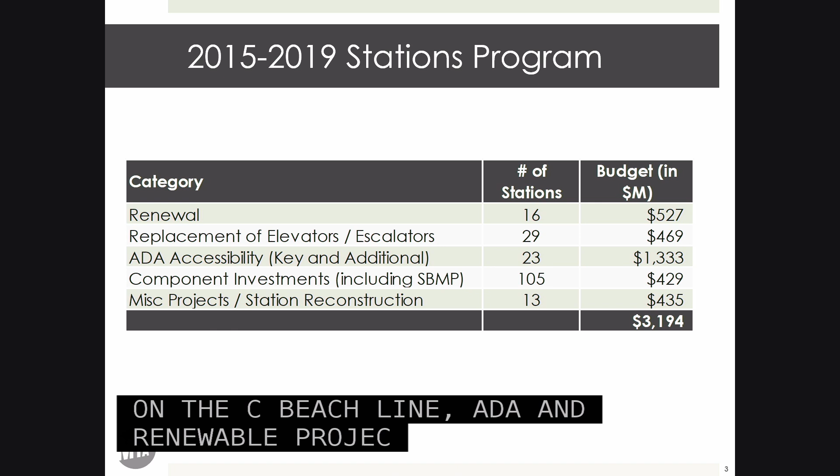Just to recap, the 2015 to 2019 stations program includes renewals at 16 stations, elevator escalator replacements at 29 stations, ADA accessibility at 23 stations, component investments at 105 stations, and miscellaneous projects at 13, totaling $3.2 billion. There's been no significant change in the overall budget since the last CPOC report.

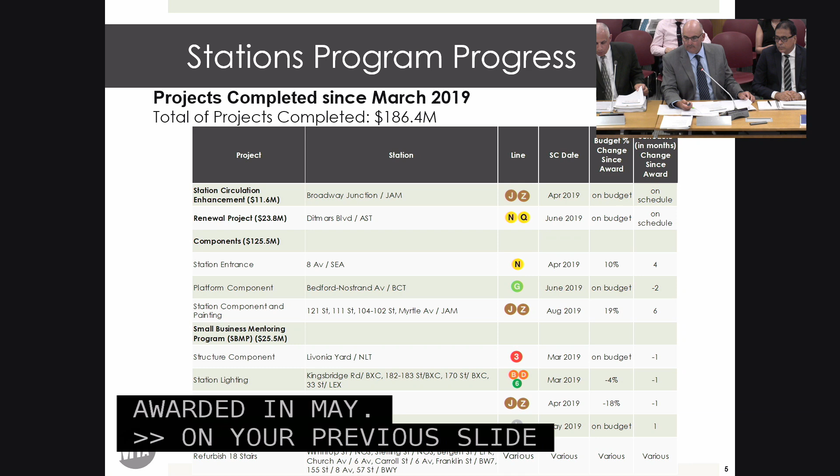On your previous slide there, on the bottom, on the Rector Street, you should have a W next to the R. And on your next page, at the top, it's the N and the W to Ditmars, not the Q. Q doesn't go there anymore. Thank you, Andrew, as always, thank you.

Let's see where we are. All right, so this slide, thank you, Andrew. This slide shows projects completed since the March 2019 report.

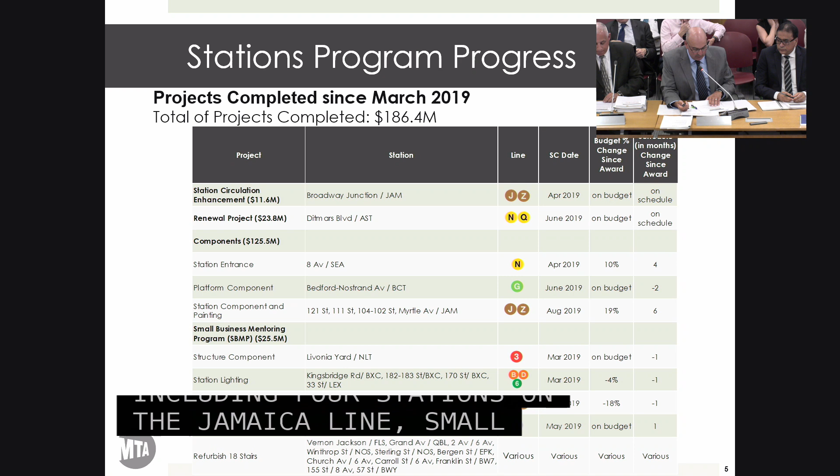Completed projects include station circulation enhancements at the Broadway Junction Station on the Jamaica Line, a station renewal project at the Ditmars Station on the Astoria Line, component projects at 6 stations, including 4 stations on the Jamaica Line, and small business mentoring projects at various stations, including the rehabilitation of 18 stairs. 8 of these projects were completed within or under budget and schedule, while the 8th Avenue Station entrance and the Jamaica Line component projects were over the original budget and schedule due to necessary extensive steel replacement and repairs, with excusable extensions of time to complete the additional work. The completed total projects was $186 million.

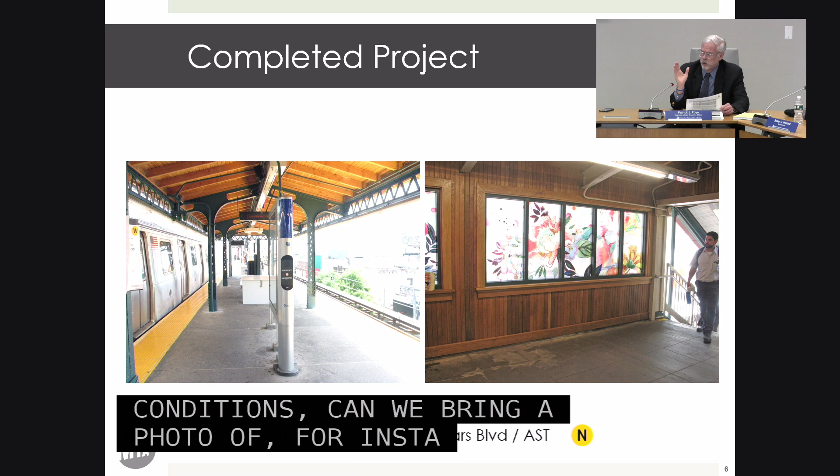So Tony, next time where there's unexpected conditions, can we bring a photo of, for instance, anything that's 10% or over? Bring a photo to show the board and the public? Yeah, and actually, I think we'll have some on the Jamaica project. Terrific, thank you. That will be good. Good.

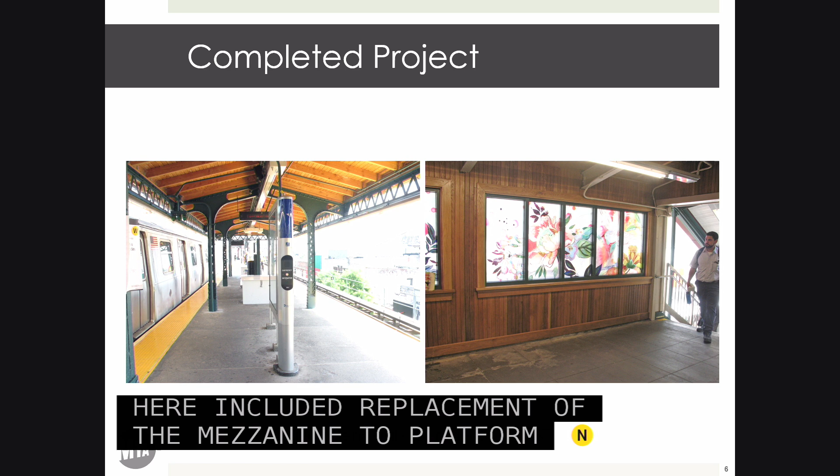So here's an example of a completed project on the station renewal at Ditmars Boulevard. Major scope items here included replacement of the mezzanine to platform stairs, replacement of mezzanine floors, doors, and windows, replacement of canopies and windscreens, repair of column bases, new platform edges, rubbing boards, tactile warning strips, and ADA boarding areas.

Yeah, we'll fix it. Thanks.

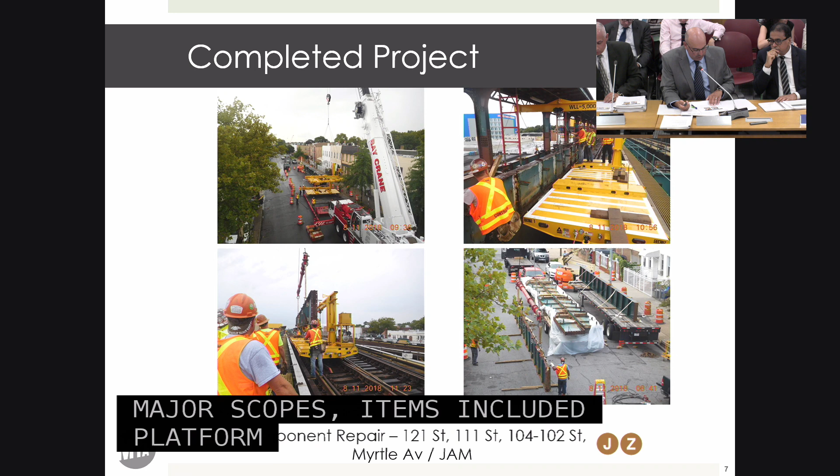These photos show the station component project at the 4 stations on the Jamaica Line, and this is actually the project where we did have extensive steel replacement. The major scope items included platform girder replacement, platform reconstruction and new edges, canopy extensions and new windscreens, new platform lighting, replacing mezzanine to platform stairs, and column repairs. These are actually the slides that show the steel.

So Tony, just on that one, unexpected conditions on stations is not an infrequent thing. Is there some way, without doing something invasive, to get a sense of the conditions in terms of steel, platforms, et cetera, before work starts? Do you want to take it?

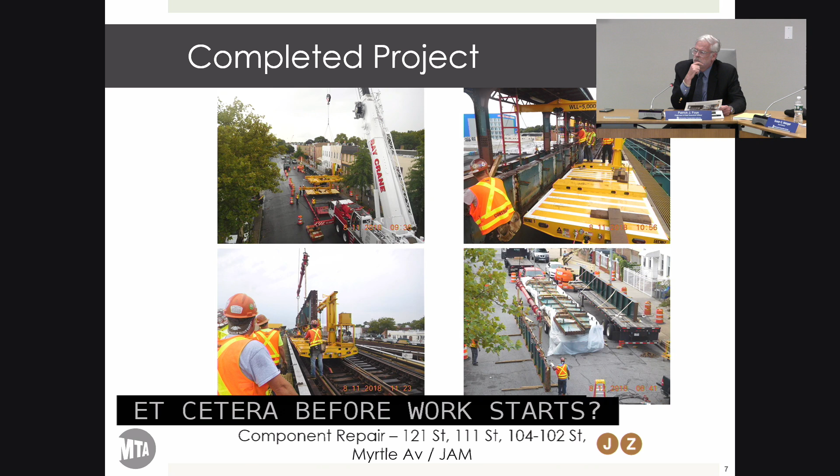Actually, we're looking at this one right now. I think we have seen several projects, mostly the elevator structure. I think for ourselves also, we got to do something different. So what we're trying to do right now, part of the design, is do some sample exploration. In fact, we are now putting those projects as consultant design - that scope is part of the consultant - and some projects are in-house design. We're hiring a contractor right now to support our in-house team. This way, we will know part of the design so we can scope it appropriately.

Earlier today at a committee meeting, we did add money for the Fort Hamilton Parkway issue that you uncovered. This is a problem that also impacts the work that the railroads are doing on their own stations. Metro North has a lot of stations that need to be repaired, and one of the major causes of cost overruns is we open them up and they're a lot worse. So this is an example of something that really needs to be spread into the operating agencies as well as capital construction. Any technology you come up with may be useful to them, just as it is to you.

Absolutely, actually, this is the one we're trying to make sure of. Many of those things we learn right now, historically, because there is another problem - we don't have the geo, we don't have the access, all these things. So visually look at this one. Once you take the peel of the paint, then you see it - or nothing behind it. So the one simple concept I am telling my team: if we expect a contractor to do something, remove the plank, I want to know what is underneath. If the steel structure is good, or you're taking a wall out, you want to know what is behind the wall, what to expect. So we're doing those explorations now in order to get the scope right and the quality design. So we most certainly will share with them.

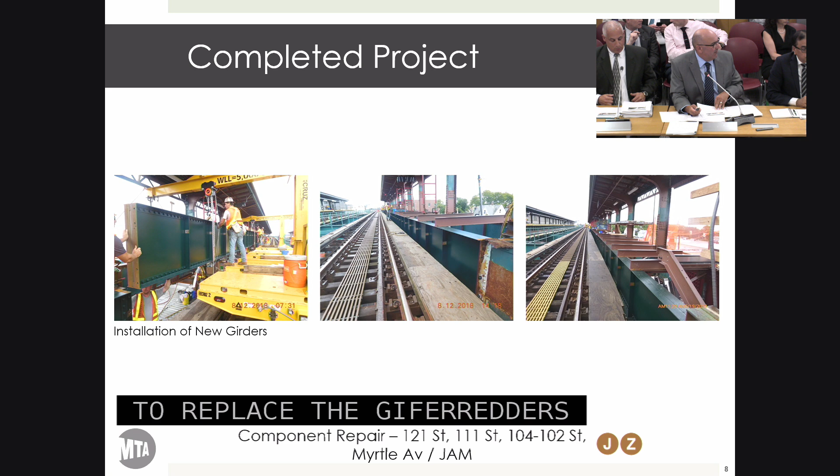So these photos actually show the additional work we had to do on the Jamaica Line at 104th, 111th, and 121st Street. The contract had called to repair these trackside platform steel girders at the 3 stations. When they were uncovered, there was extensive corrosion, especially on the top flanges and in the webs. So it turned out we had to replace all the trackside platform girders on 6 platforms at 3 stations - about 11 or 12 50-foot girders at every station, plus the steel structure that sits on top of it, and rebuilding the platforms. So it was fairly extensive.

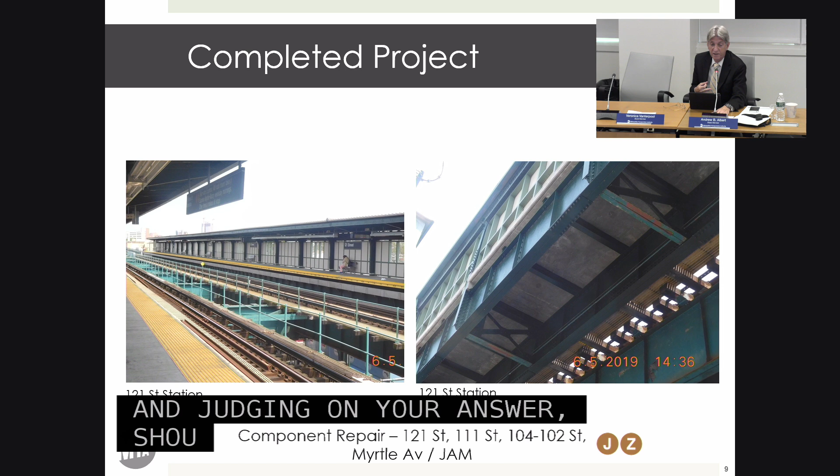Can I just ask, while you described that condition, how many years do you think it took for that to become that way? And judging on your answer, should we be inspecting our elevated structures on a more frequent basis? Well, these are original girders, so they're probably 100 years old. I think there is a standard, we have the inspection plan already - every 4 to 5 years. Would that regular inspection have uncovered this? They will not uncover this. Like I said, we don't go and take the paint off and all this. So that requires special attention during the design.

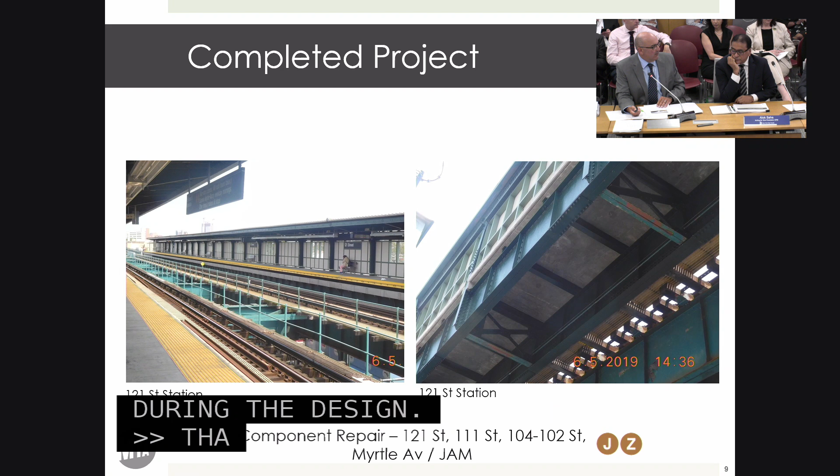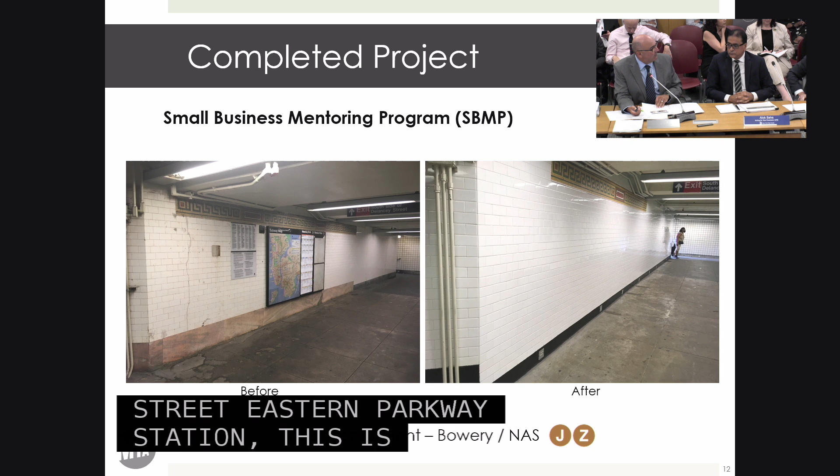Again, these are just more photos of the completed work at Jamaica, showing the new concrete platforms and new windscreens. This is the 104th Street station, similar work again - new platforms and new girders that were replaced. These next few slides show completed work in the small business mentoring program: a subway stair refurbishment at the Bergen Street Eastern Parkway station, a mezzanine component project at the Bowery-Nassau station with some new tile work, and another refurbished stair at the 155th Street station on the 8th Avenue line.

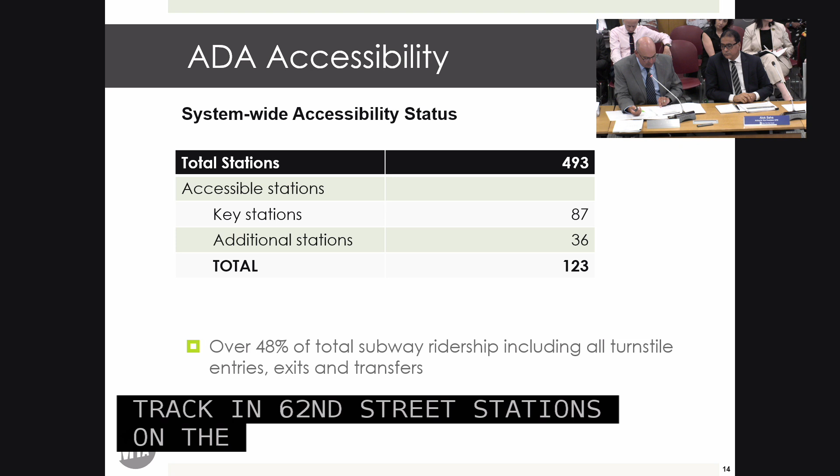I'll move on to ADA accessibility. The next slide shows the system-wide accessibility program status. Out of a total of 493 stations, including Staten Island, 123 stations are accessible - 87 key stations and 36 additional stations. An additional 3 accessible stations were placed in service since the last report. These include 86th Street on the Lex, which was a developer project, and New Utrecht and 62nd Street stations on the Sea Beach West End lines. These stations are utilized by over 48% of total subway ridership based upon turnstile entries, exits, and transfers.

For the 13 remaining key stations, 68th Street-Hunter College is in final design, and 12 are currently in construction, for a total of $883 million.

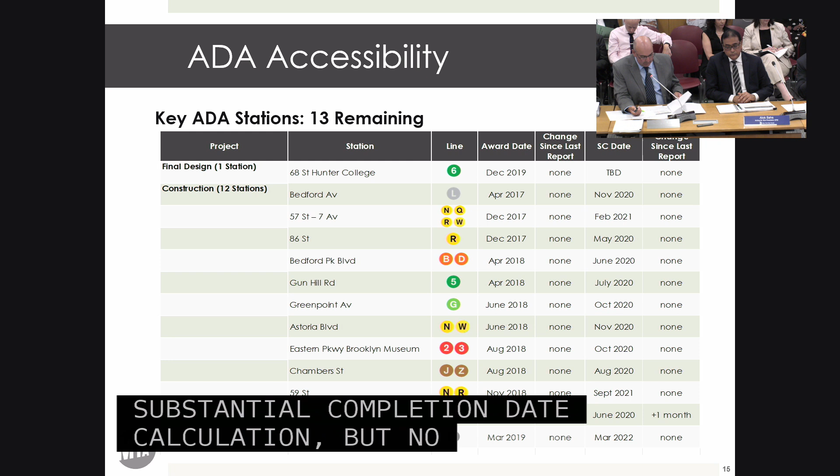Just to point out, the Rockaway Parkway schedule moved by 1 month from the previous report. There was an error in the substantial completion date calculation, but no change in the contractual duration of 18 months. And have the issues with Hunter College been resolved? No, they're not resolved.

In addition to the key stations, we also have 23 additional ADA stations in various phases of design and construction. 6 are in pre-design, 13 are in design, and 4 are in construction. 7 stations have been added since the last report in design and pre-design. These stations total $1.3 billion.

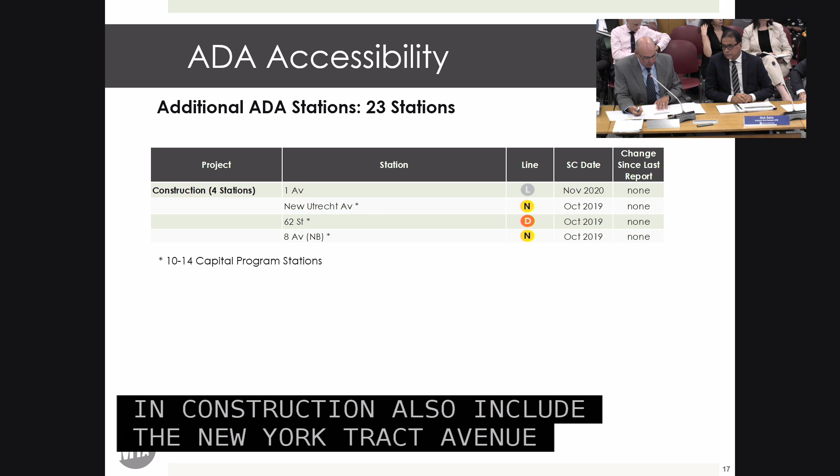Additional ADA projects in construction also include the New Utrecht Avenue and 62nd Street stations, which were placed in service in July. More detail on the Sea Beach Line stations will be discussed later in the report by Bill.

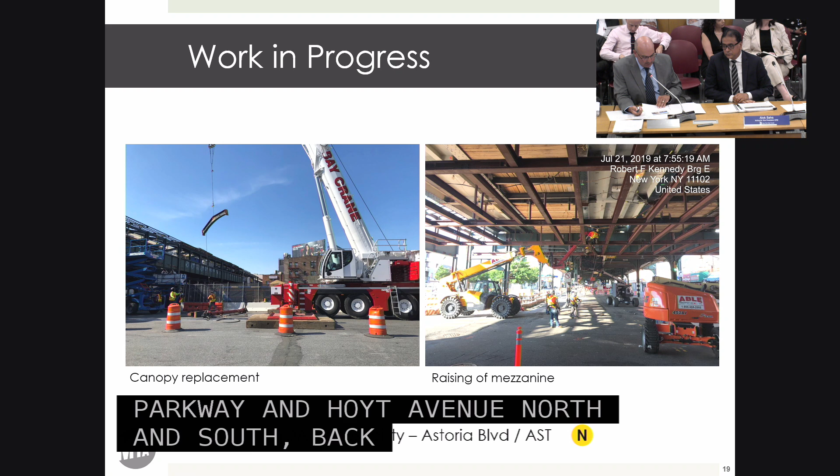Major scope items include 4 elevators, 2 street and 2 platform, structural steel repairs, full reconstruction of the hung mezzanine for additional truck clearance, and extensive coordination of street intersection closures in conjunction with GOs and city field events. So cooperation of DOT has been integral to moving this one along.

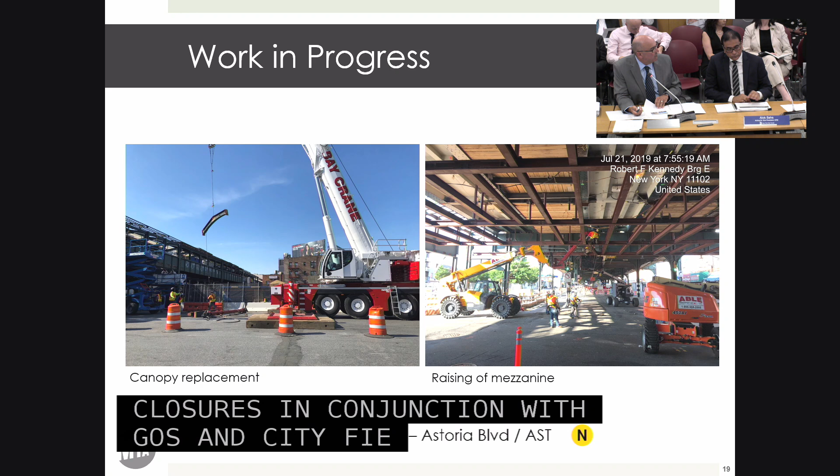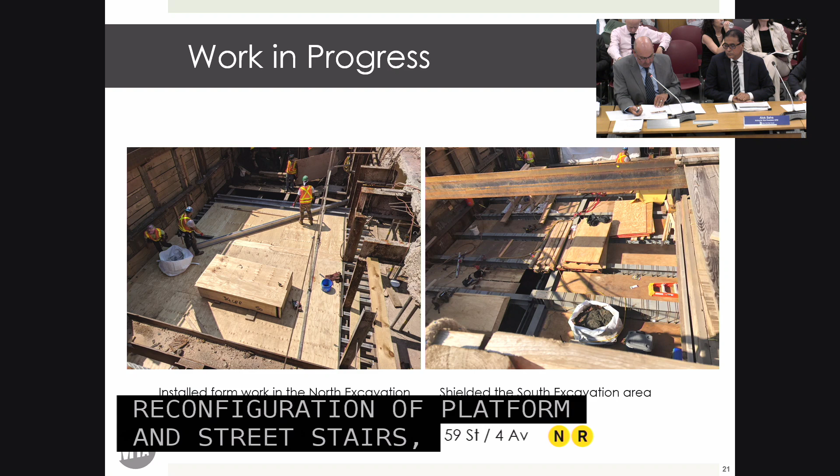These are some photos of the ADA project at the 59th Street station on the 4th Avenue line in Brooklyn. The scope includes 3 new elevators and machine rooms, 1 street to mezzanine, 2 mezzanine to platforms, relocation and reconfiguration of platform and street stairs, expansion of the north mezzanine, and ADA boarding areas with tactile warning strips. These are just some conditions.

Bill Montanil will continue with the status of the system-wide accessibility study and the Sea Beach renewal project. Thank you and good afternoon.

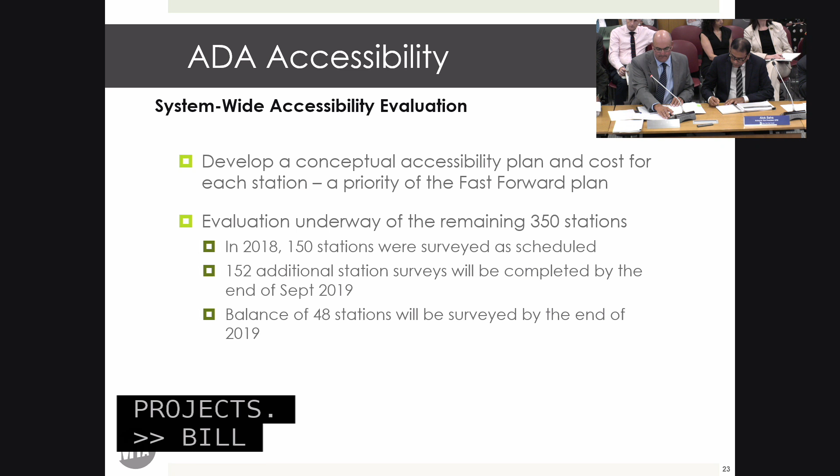This slide shows the progress of the system-wide accessibility study. Evaluations of the remaining 350 stations are underway. 150 station surveys were completed by the end of December 2018 as scheduled. An additional 152 stations will be surveyed by the end of September 2019, an increase of 88 stations since the last CPOC report, with the balance completed by the end of 2019.

And Bill, those last two bullets—we're going to hold to those schedules? Yes, sir. Thank you. The evaluations develop a conceptual accessibility plan and order of magnitude cost for each station, a priority of the Fast Forward plan.

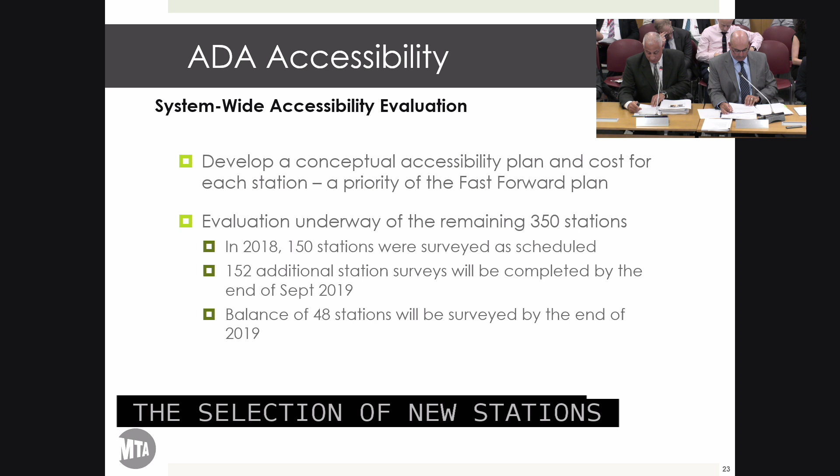The evaluations will inform the selection of new stations and have informed the selections of new stations in the next and subsequent capital programs. We will be advancing the Fast Forward plan strategy of an additional 50 accessible stations with the strategy of no more than 2 station stops away—recently increased to 70. Yes.

I am happy to report that the 6-station renewal project was placed in service July 2019 as scheduled. In addition, the ADA elevators at the New Utrecht 62nd Street complex were placed in service July 2019, making both stations completely ADA accessible. The 8th Avenue Station northbound elevator remains on schedule for operation in October of this year, and the additional work associated with the southbound elevator will be deleted from this contract and included in an upcoming ADA elevator contract that I will speak about shortly.

The substantial completion of the 3-station renewal project was achieved on March 6th, 2019. No change since the last report. The 7th Avenue entrance of the 8th Avenue station was completed in April 2019 on schedule, and the substantial completion date of the 6-station renewal for October remains on schedule. The project budget has decreased by $18 million due to the 8th Avenue elevator being repackaged with another project.

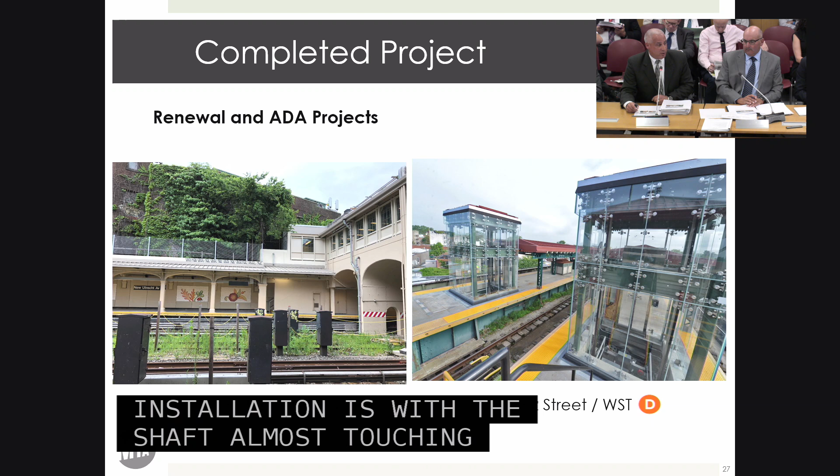These are some photos of the refurbished New Utrecht station and 62nd Street station. Just call your attention to the photo on the right of the 62nd Street platform, showing how tight the elevator installation is, with the shaft almost touching the yellow tactile edge. It's impossible to put that elevator in the middle of a station; it had to be put at the end of a station.

Regarding the elevators at 8th Avenue, the northbound elevator is on schedule to be put into service by the end of October, and the southbound elevator will be included in another contract to be awarded in the first quarter of 2020 with an in-service date of December 2020.

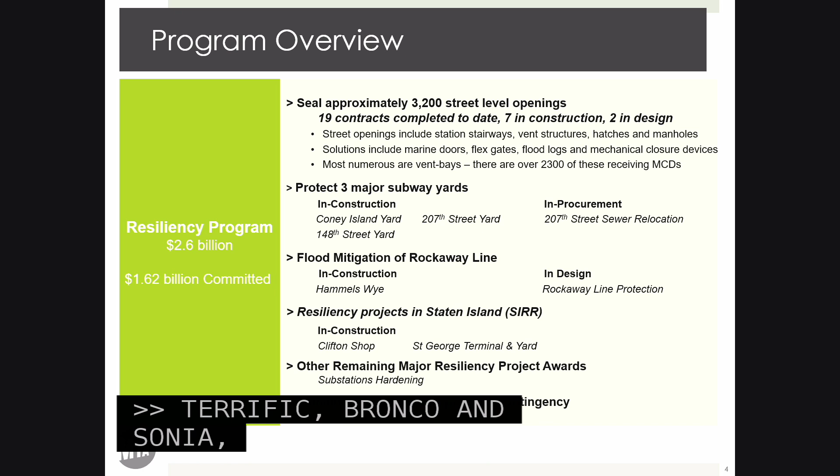Good afternoon. My name is Branko Kleva. I'm program executive for the Sandy program. Sonia J. Singh, executive for infrastructure division, and I will be presenting the Superstorm Sandy Recovery and Resiliency Program update. The update includes program overview and updates of the 3 yard projects and the Clifton Shop reconstruction project.

In the recovery program, so far we have rehabilitated 7 of the 9 underground river tunnels that were flooded during Superstorm Sandy. Of the 2 remaining tunnels...

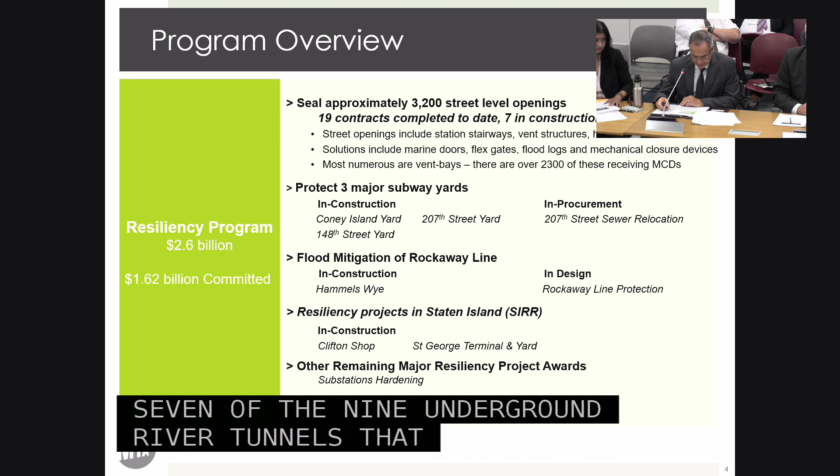Sorry, can you go back a page on the PowerPoint? Yes. Thank you, sorry, I jumped. No problem.

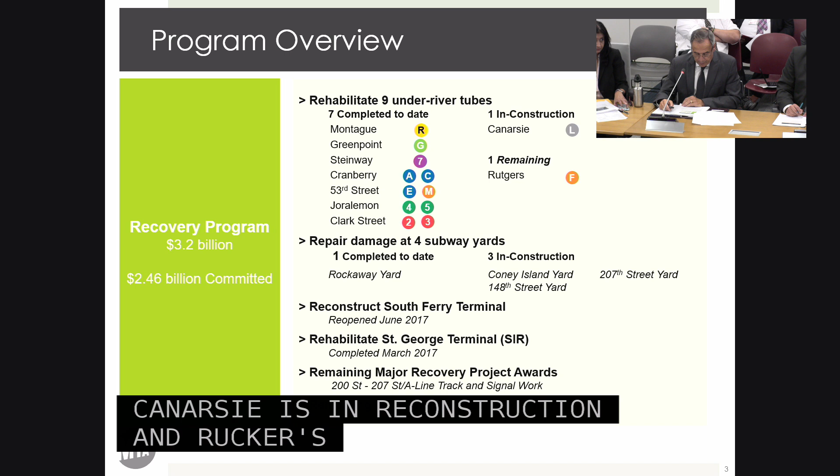So in the recovery program, we have rehabilitated 7 of the 9 tunnels. The 2 remaining, the Canarsie Tunnel and Rutgers Tunnel—the Canarsie Tunnel is in construction, as you know, and the Rutgers Tunnel would follow after the L-line tunnel is completed. We have repaired damages at the Rockaway Park Yard, and the other 3 yards are in construction, and I will provide more details on the progress of those 3 projects.

There are only several recovery projects remaining to be awarded, one being the rehabilitation of track and signal equipment along the A-line between 200th and 207th streets, which will be issued as a design-build project next year.

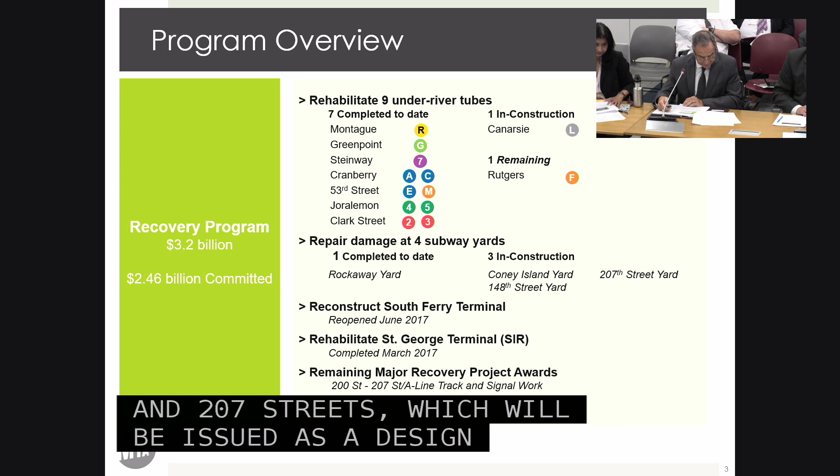As part of the resiliency program, we are well on our way of installing various devices to protect flood vulnerable street openings, including station entrances, vent structures, hatches, and manholes. All of these devices, such as marine doors, flex gates, flood logs, and mechanical closure devices, are custom made for each opening. Vent bays are most numerous.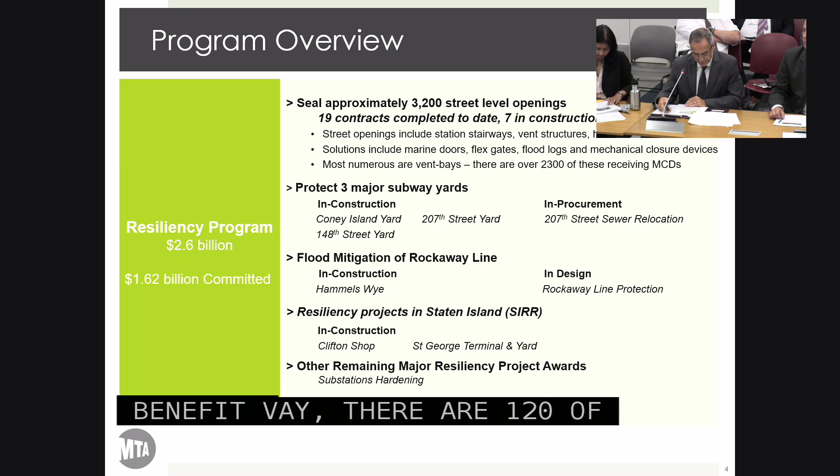There are over 2,300 of these, and we are well on the way of completing the projects to close them all. The 3 yard projects, Coney Island, 148th Street, and 207th Street Yard, include both repair and resiliency work. More details on these will be coming up in the upcoming slides.

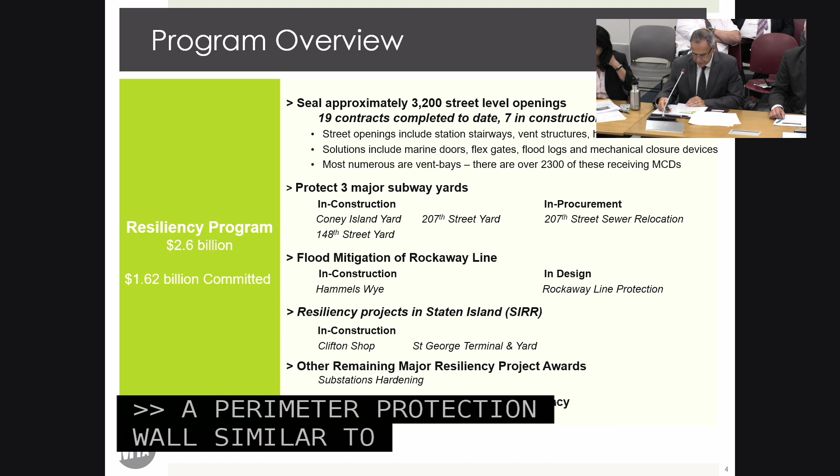A perimeter protection wall similar to what is being installed at the 3 yards has been installed at Hammels Wye facility in the Rockaways, while further protection of the Rockaways is being developed and will also be issued as a design build project next year.

Also, a project to protect the St. George Terminal in Staten Island has been awarded for construction, and a design build project for the new resilient Clifton maintenance shop is underway, and Sonia will provide additional information.

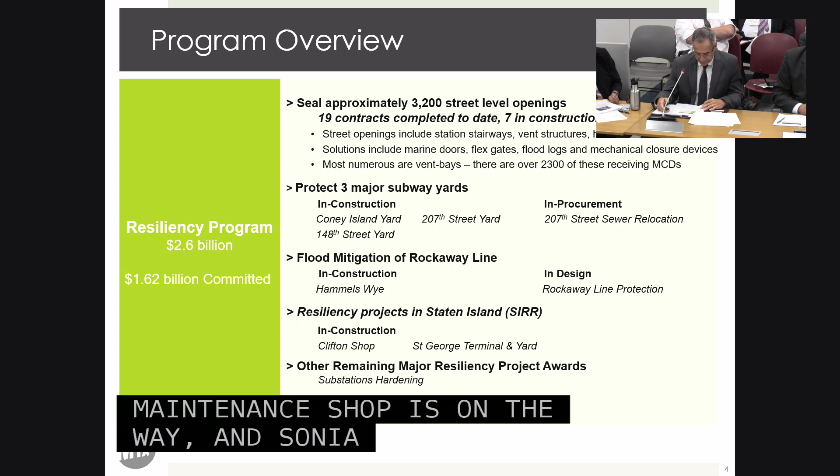One of the remaining resiliency projects includes hardening of power substations, which is to be awarded as a design build project next year.

The Coney Island Complex is the largest rapid transit facility in the world, covering 95 acres. It includes 3 smaller yards serving 6 subway lines and has capacity to store 881 rail cars. It houses 4 train repair shops, a rail car wash, various equipment and support facilities.

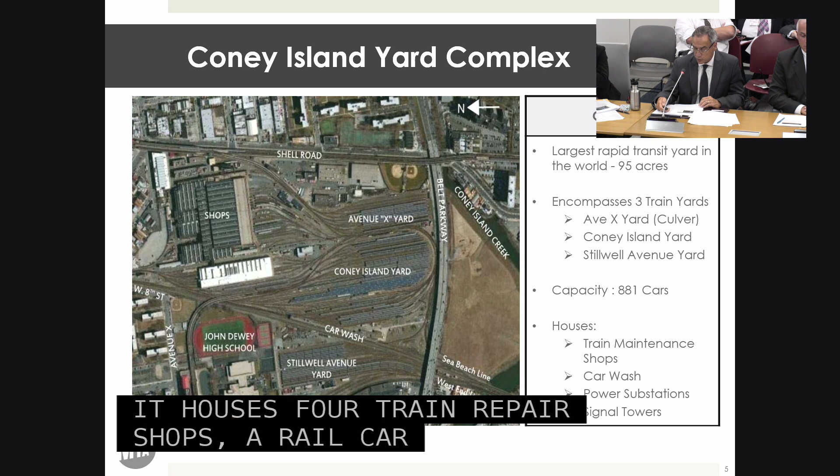The Coney Island Yard was awarded to Tully Construction in March of last year. The project involves installation of approximately 12,000 linear feet of flood wall, 9 floodgates, hardening of the traction power motor shop,

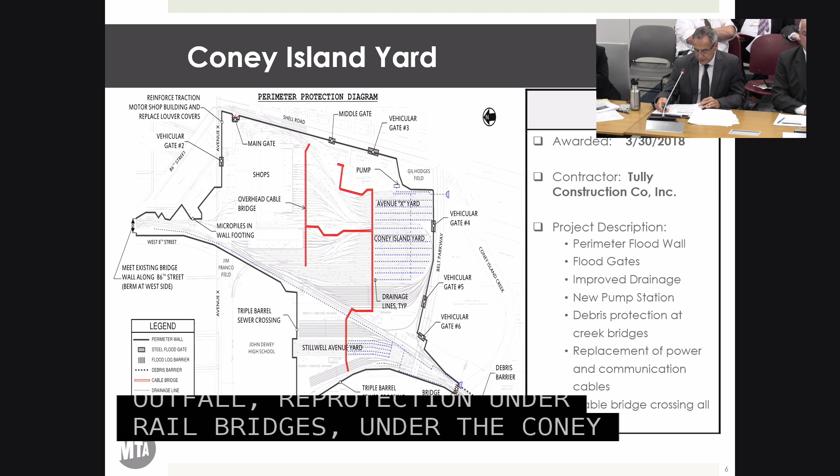21,000 linear feet of new drainage, 2 new pump stations, an additional outfall, debris protection on the rail bridges over the Coney Island Creek, as well as construction of a bridge that will carry power cables and communication cables across the yard tracks. It also includes the replacement of power communication cables that were damaged during Superstorm Sandy.

The project is on schedule and within budget.

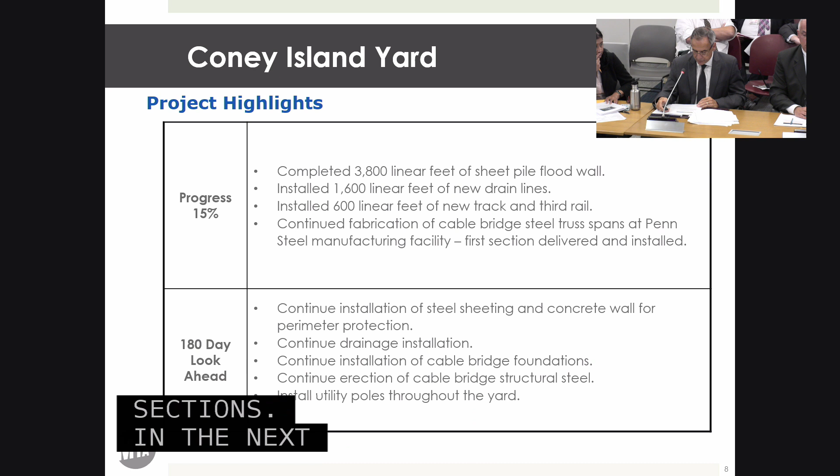The project is approximately 15% complete. In the last 6 months, the contractor has made significant progress in the installation of flood wall and new drainage. He has also continued with the fabrication of the cable bridge and has delivered and installed one of the sections. In the next 6 months, the contractor will continue with the installation of the perimeter wall, drainage improvements, and the cable bridge.

And Bronco, 15% is where they should be in terms of the schedule they gave us? Yes, as far as the 15% is representative of what the contract would be at this time. Usually in the beginning of the job, there is mobilization and other work that eats up the time. They catch up as the project goes on. Thank you.

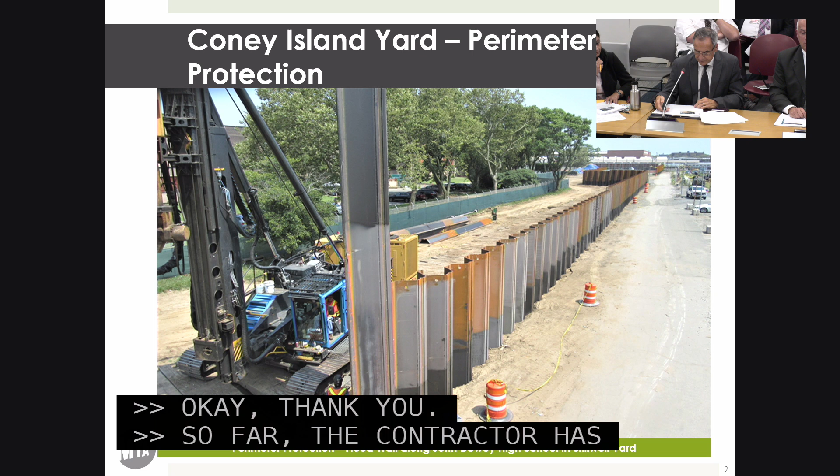So far, the contractor has installed over 3,800 linear feet of perimeter flood wall, which ranges in height from 8 to 14 feet, and is driven approximately 30 feet below ground. He has also installed over 1,600 linear feet of new drain lines.

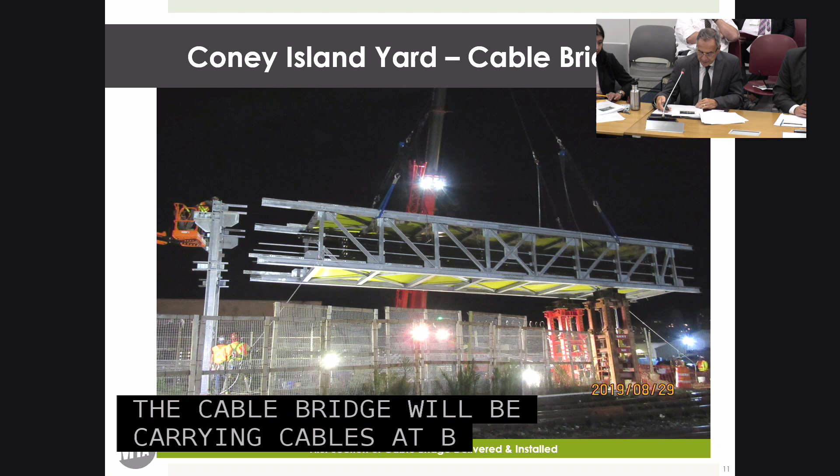This is an installation of the first cable bridge section. The cable bridge will be carrying cables, both power and communications, which makes it easier for maintenance, and also easier to install because they are not on the ground and on the tracks as they previously were. The bridge would also serve as a walkway for employees, making it easier and safer to go across the yard. It was fabricated off-site and brought to this site.

It is fabricated off-site and then delivered in approximately 60-foot sections. Thank you.

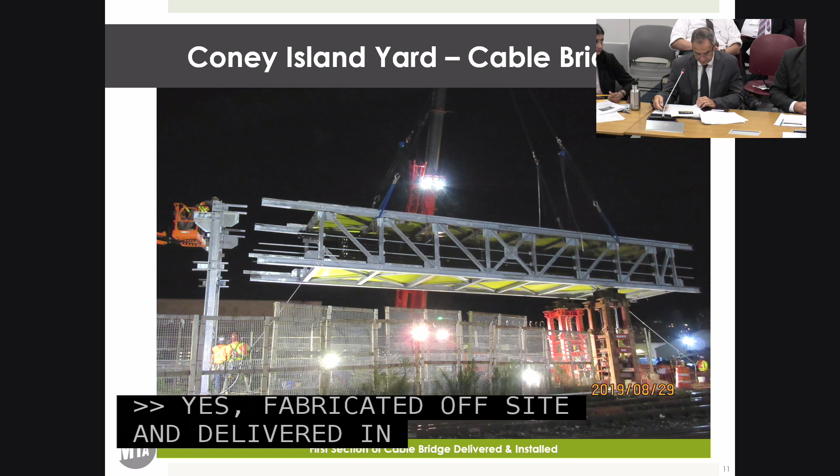All of the project milestones are on schedule, and there are no significant outstanding issues. The project team and the contractor are being proactive in anticipating risks and taking appropriate steps to mitigate each risk.

Some of the remaining project risks include storage space for storage areas, as well as tight clearances within the yard for placing cranes to install the cable bridge. The risk for storage has been partially addressed by the contractor acquiring adjacent properties and by coordinating with yard management. Similarly, there is ongoing coordination with yard management for track outages and for staging the crane and other construction equipment.

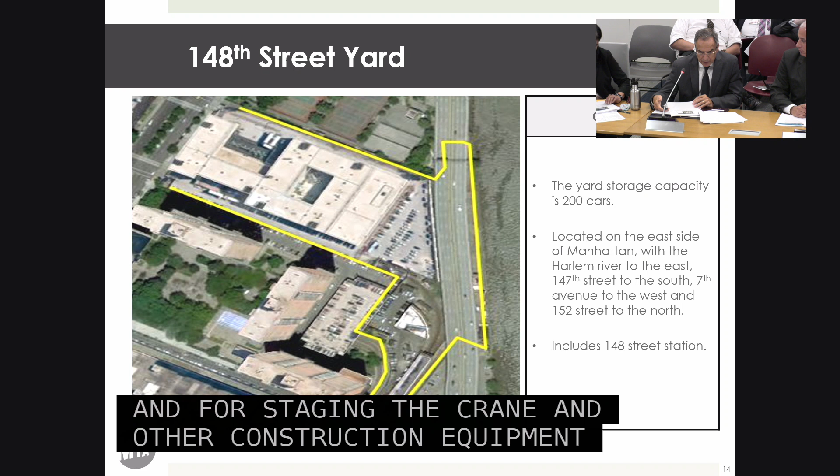148th Street Yard is located on the east side of Manhattan between 147th and 152nd Street, next to the FDR Drive. It serves as the storage yard for the IRT's number 3 trains. There is a station, 148th Street, within the yard itself.

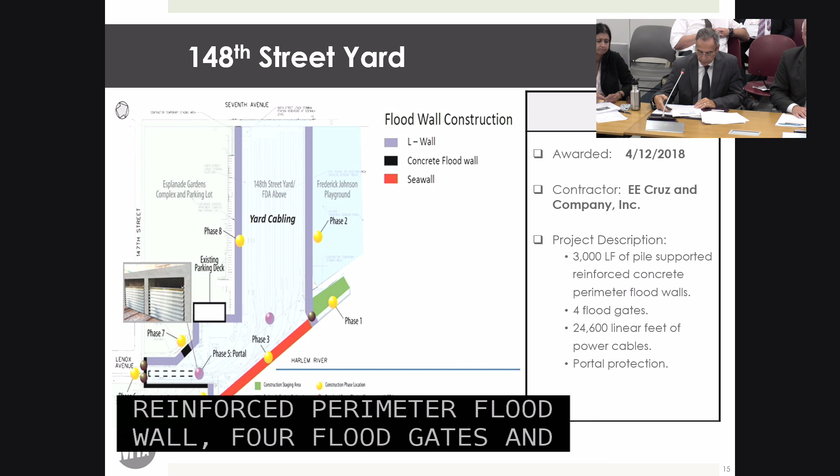The project was awarded to EE Cruz in April of last year. The project includes installation of 3,000 linear feet of pile-supported reinforced concrete perimeter flood walls, 4 floodgates, and a deployable lock system at the tunnel portal. It also includes the replacement of about 24,000 linear feet of power and control cables.

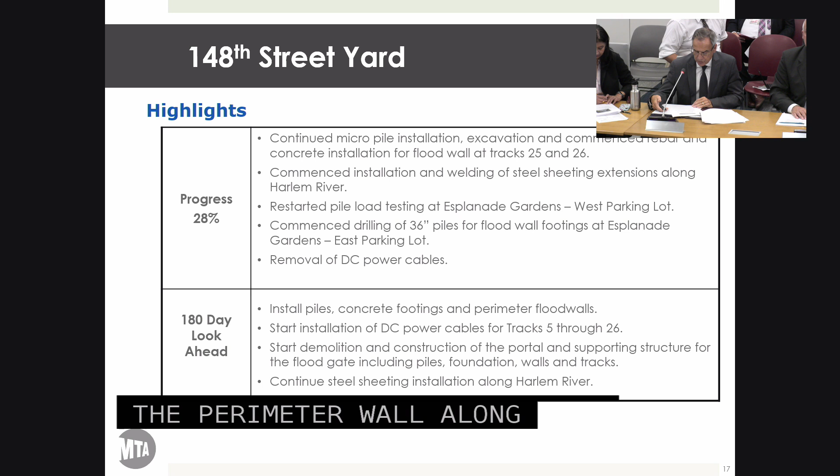The project is on schedule and within budget. The project is 28% complete. The contractor is progressing well with the installation of the perimeter wall along tracks 25 and 26 and along Harlem River. He is also making good progress with the pile installation in the Esplanade Gardens parking lots.

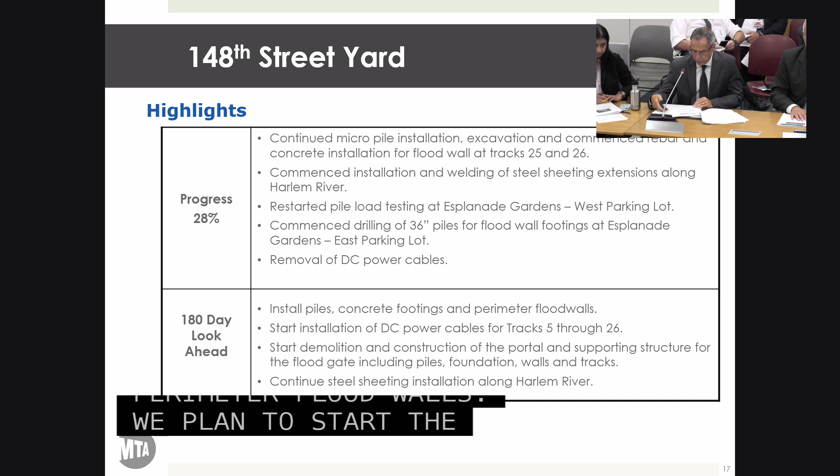In the next 6 months, we'll continue to install piles, concrete footings, and perimeter flood walls. We will plan to start the installation of DC power cables and the demolition and construction of the new portal and supporting structure for the floodgate.

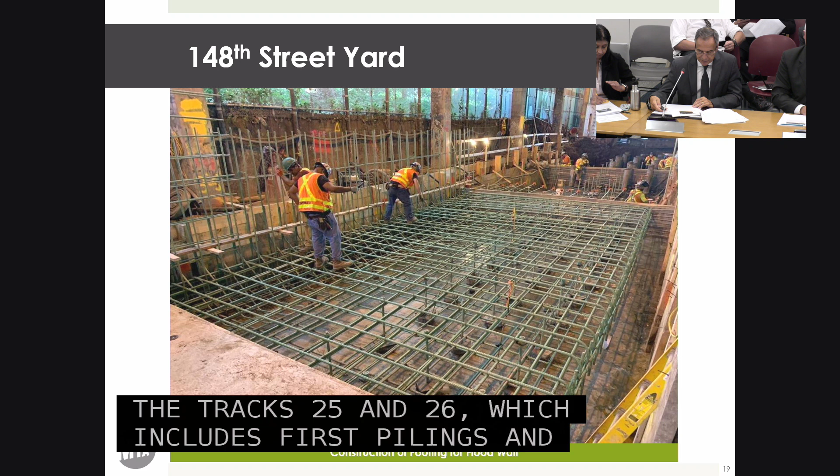All of the project milestones are on schedule, and there are no major outstanding issues. We have met the first 3 milestones and expect to meet the rest.

Two of the top risks for the 148th Street project include access to Esplanade Gardens parking lots. Esplanade Gardens is an apartment complex sharing the yard property line, and some sections of the perimeter wall need to be constructed from the Esplanade Garden site, for which we have secured easements during the design phase. Coordination with Esplanade Gardens management is ongoing and working well.

Another risk involves work at the portal that requires track access. To mitigate this risk, the contractors developed a detailed work breakdown with timeline for each task.

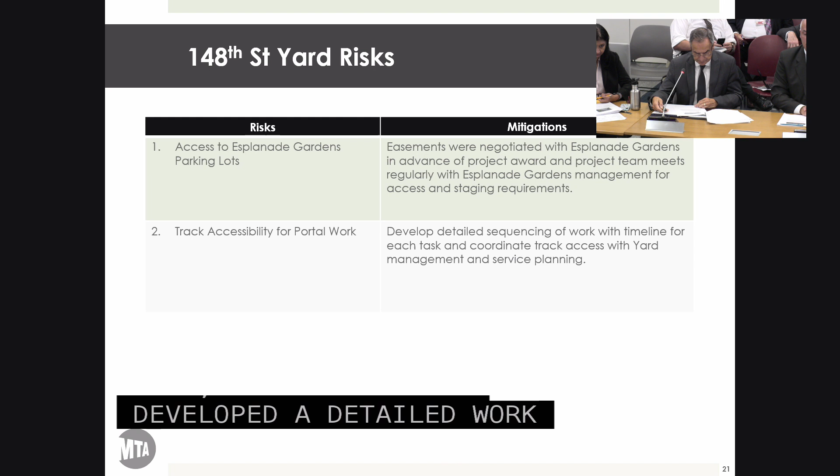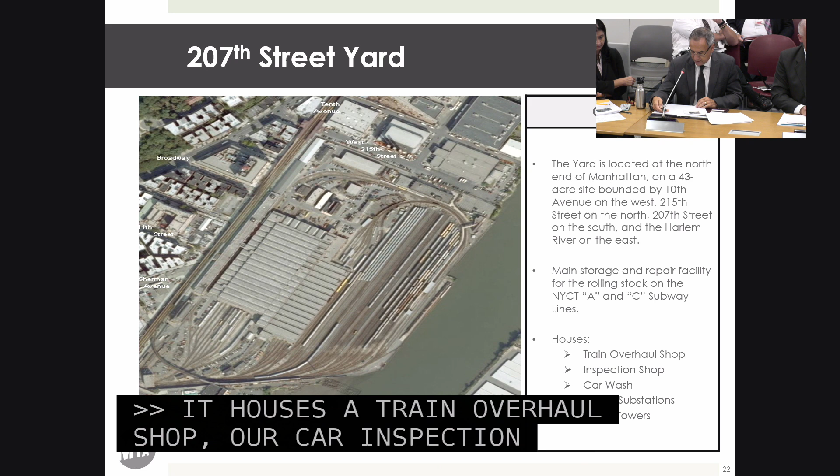The project was awarded to Walsh Construction Company in September of last year. The project includes perimeter wall protection, similar to the other yards, installation of portal protection, also similar to the other yards, and repair and replacement of power cables, track switches, and signal system, and construction of 2 new relay buildings.

The project is on schedule and within budget. The project is approximately 9% complete. Again, here, as in Coney Island Yard, at the beginning of the project, the percent complete lags the actual time, but that is not a concern at this point.

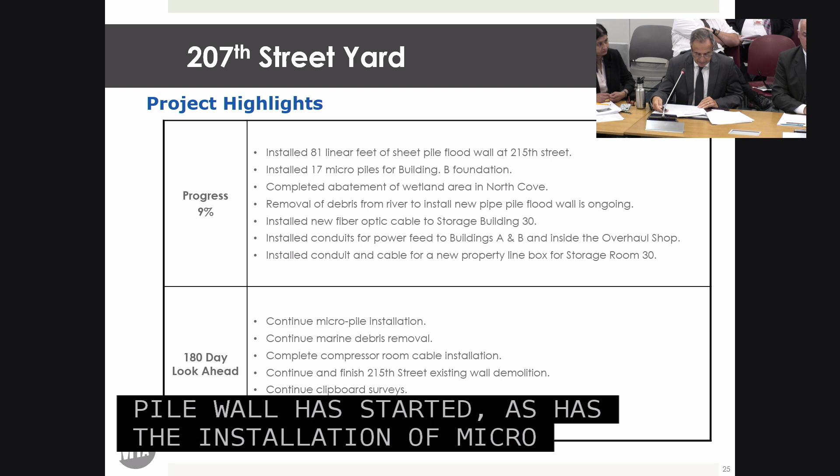Installation of the sheet pile wall has started, as has the installation of micropiles for Building B foundation. Cleanup of wetland area in the North Cove has been completed, and removal of debris from the river to install the new flood wall is ongoing. Power and fiber optic cable installation is ongoing.

In the next 6 months, we'll continue with surveys and installation of micropiles, perimeter wall, conduits and cables, as well as removal of marine debris.

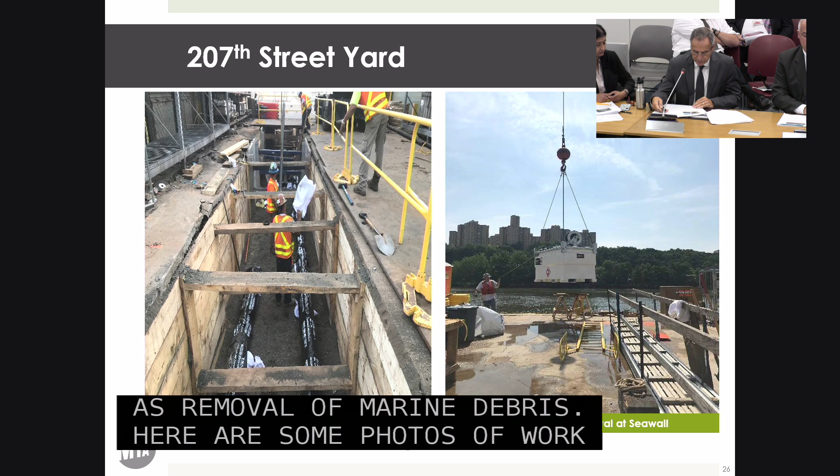Here are some photos of work in progress: installation of new utilities for Building B, and removal of debris from the river along the bulkhead.

All of the interim milestones are on schedule without major issues, except for discovery of an underground utility not being at the expected location, which requires redesign of foundations for Building A. The impact of this delay will be mitigated and should not delay project milestones.

Also, field surveys revealed more extensive deterioration of the seawall, which could impact project scope and project cost. The project team has identified a solution that will minimize this impact and will maintain the project close to schedule and budget. Details for this are being finalized. I will be reporting on it next time.

Rocco, whose risk was that? Was that Transit's or Walsh's? That's Transit's risk. Was this a design build? No? No, okay, got it. I was going to ask a question about the unexpected location of the underground utilities. What about it was unexpected? Were we told that they were in one place and it turned out they were another? Did we guess, or how does that happen?

These are utilities within the yard, and they are cabling which can't be precisely identified unless you dig up that area, and this is where all the tracks are. From the information available at the time of design, they were located in one place.

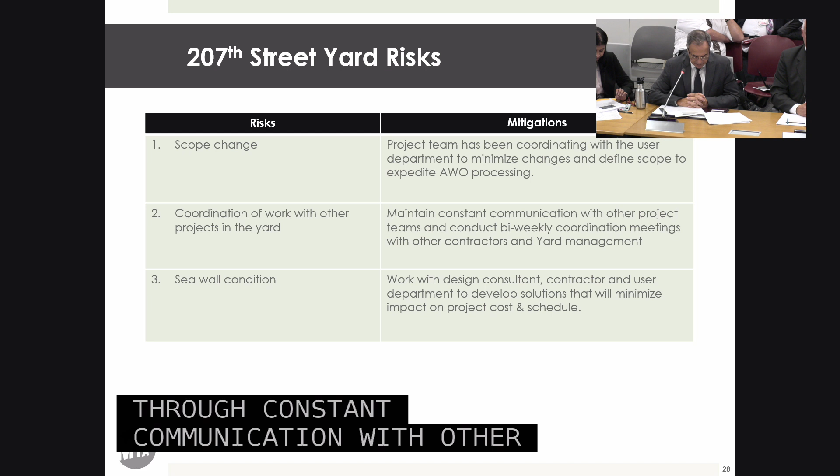Another risk is coordination of work with other projects. The team has been managing this successfully through constant communication with other project teams. A new project, the 207th Street sewer relocation, is in procurement and will require significant coordination with this project. The contract documents for the sewer project specifically require the contractor to coordinate with the main project.

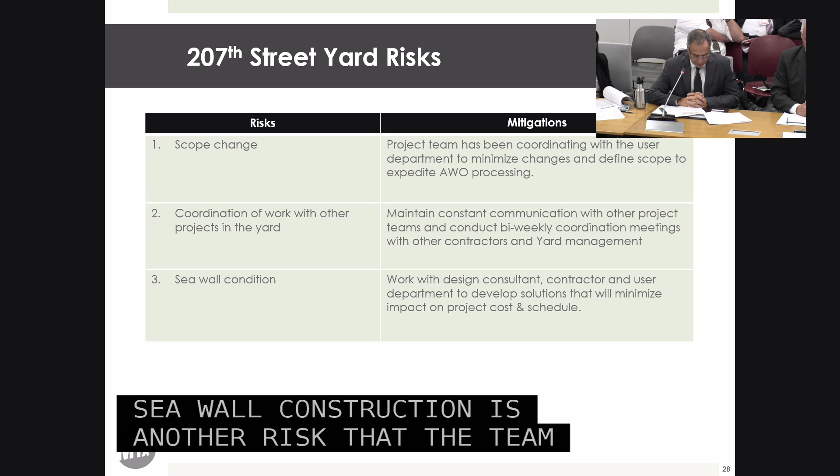Seawall construction is another risk the team is managing through proactive discussion with designers, contractors, and operations to develop a solution that minimizes impact on the project. I think we're being successful in this item as well.

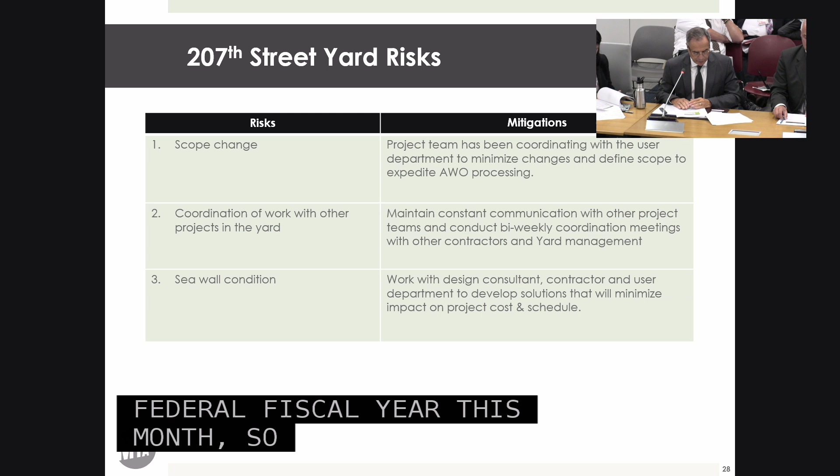A question on all these resiliency and recovery projects: I assume we're keeping our funders at FTA informed on progress and issues. Yes. As for the repair funding, that will all be in the grants by the end of the federal fiscal year this month, so all of the repair funding which was at risk is okay. 84% of the resiliency funding has also been put in grants, and the remaining will be done in the following fiscal year, but that's not at risk.

Thank you, Commissioner. Thank you, Pat. Can you comment generally on the broader picture of how we're doing on the state of resiliency post-Sandy? This seems like a piece of the puzzle. I'm sorry if I missed the bigger picture.

So at this point, Ronnie, what percentage of money's been committed and obligated? I was going to answer a different question.

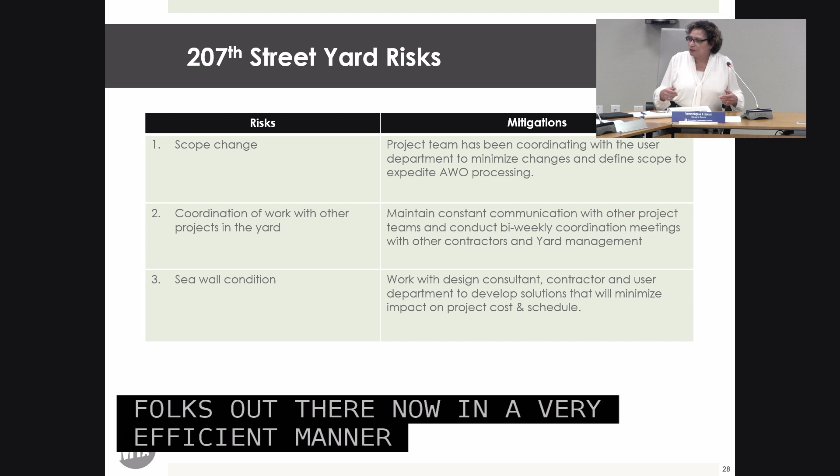Okay, you start. One of the areas where we saw tremendous impact was actually where we are now, down here in Lower Manhattan. Post-Sandy, these guys have done a great job together with our Department of Subways rebuilding stations, closing vents, putting in marine doors, seals, et cetera. When a storm is coming, you see folks out there now in a very efficient manner using all this new equipment and technology, whereas previously we were down to bags of sand and plywood.

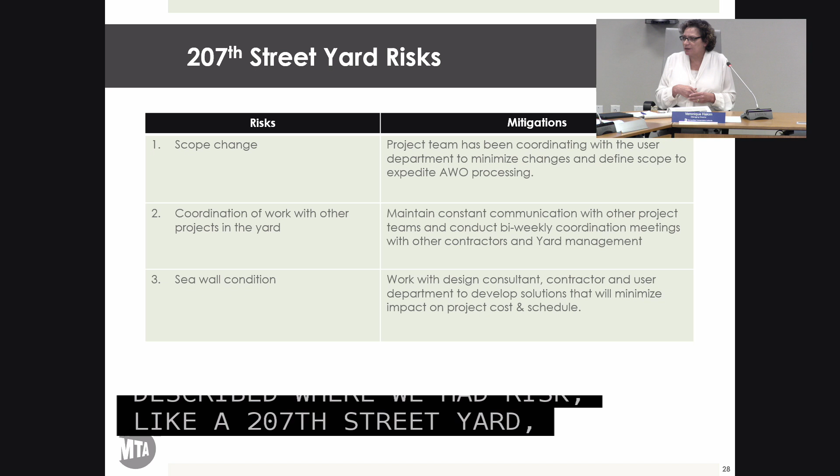So a lot has occurred in addition to the heavier projects just described where we had risk, like at 207th Street Yard, Coney Island, and 148th Street. So there has been a lot of work done. I don't know if you happen to know the percentage to Pat's question. Well, here's what I was going to suggest.

Why don't we do this, Commissioner Lacewell, if this is okay? Why don't we report in October and November where we are in FTA funding, how much the MTA got, how much has been committed, obligated, and spent? I think that would be a worthwhile exercise. Tom, can you take that on?

Also, I think it would be good for the new commissioners to see some of the photographs. The equipment is astonishing, and you should know what you're looking at if you drive into a tunnel or see something that looks a little odd at South Street. It's very interesting. Andrew.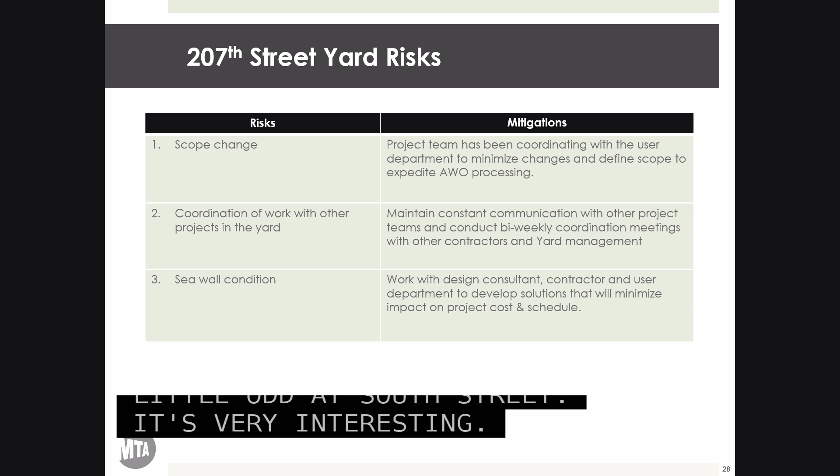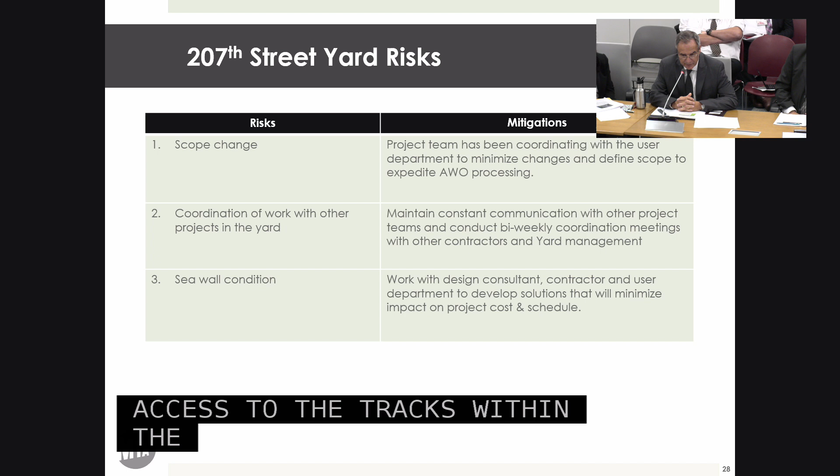Has the work at either 148th Street or 207th Street yards affected the train use of those yards? Is most of the equipment coming in by road versus rail? There will be some impact, but it hasn't started. When we do portal work, we will need service diversions for those tracks where they enter the yard. We also need access to tracks within the yard for storage, and we take, depending on the area, 2 to 4 tracks at a time. We coordinate that with track management so they can still maintain yard operations. All right, thanks.

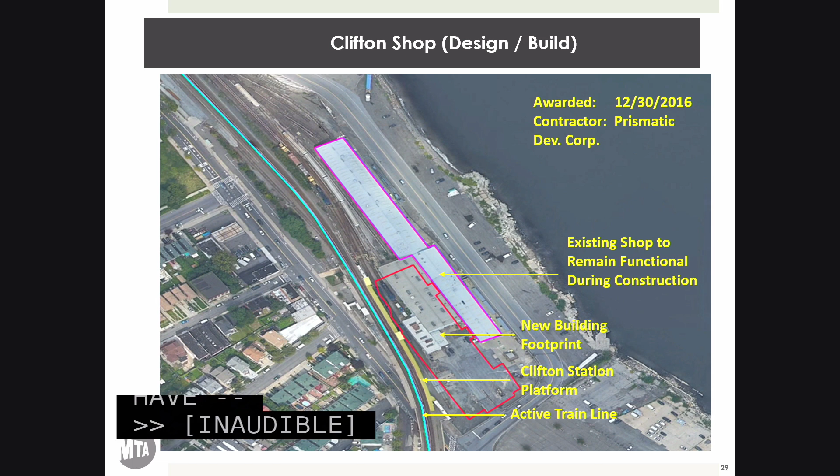Any other questions before we get to Clifton? I think one of the things, Pat, the commitment to Sandy, there's a slide, the first 2 slides, shows the dollar budget and how much is committed for the recovery and also the resiliency. But I think we're more than happy to show some of the pictures that give you the overall, the many things that we have. I think we're in a... Not for the entire MTA, it's just for New York City Transit.

Forgive me. What would be important for new commissioners and existing commissioners is to get a sense of how much the FTA granted, how much has been committed, obligated, and spent. Sure, let's try to do that in October and November, in addition to pictures of the work and equipment. Does that make sense? Yes, thank you, Pat.

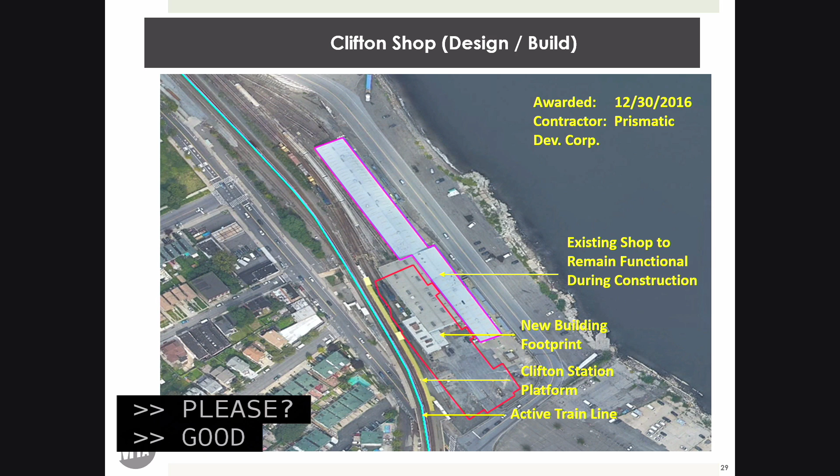You want to move on to Clifton, please? Good afternoon, my name is Sonia Jai Singh, and I'm going to talk about the Clifton Shop, located on Front Street and Bay Street, adjacent to the Clifton Station in Staten Island.

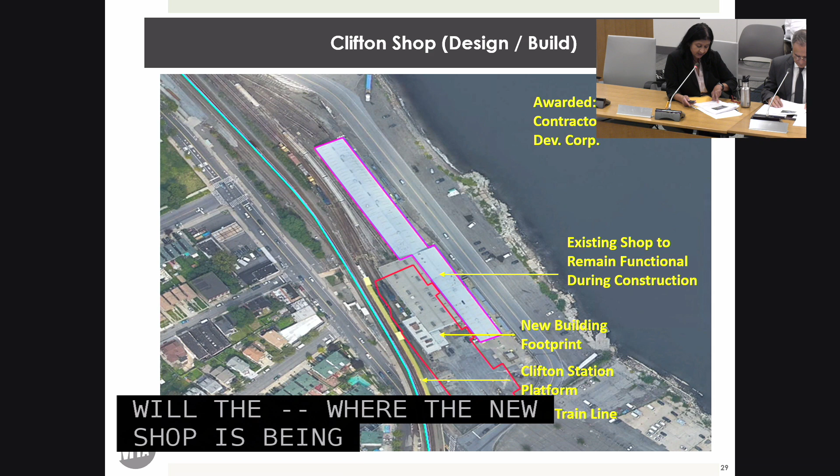Superstorm Sandy had a major impact on the shop. The new shop is going to be designed at SLOSH category 2 plus 3 feet flood level. It's a design-build contract awarded in December 2016 to Prismatic Development Corporation. It's also the first design-build where we have an existing shop which will remain operational throughout construction. The highlighted red box on the slide is where the new shop is being built, and the pink box outlines the old shop that will remain operational until the new shop comes online.

The original substantial completion for the shop was July 2020, a 43-month construction duration. An extension of time was issued to the contractor, with a new contractual substantial completion of October 2020. With this extension, the project is 7 months delayed, and substantial completion is now forecasted for June 2021. In order to prevent further schedule delays, the contractor has started working extended hours and weekends. They've proposed a second means of entry to the site via the underpass of the station, for material delivery during off-peak hours. This has been granted by Staten Island Railway and the community, who have also been notified.

Their manpower has increased since we last reported. At that time, the average was 30 to 40 personnel per day. It's now 50 to 60. The plan is to ramp up to 70 to 100 once the building is fully enclosed and several trades are working concurrently. We are within budget.

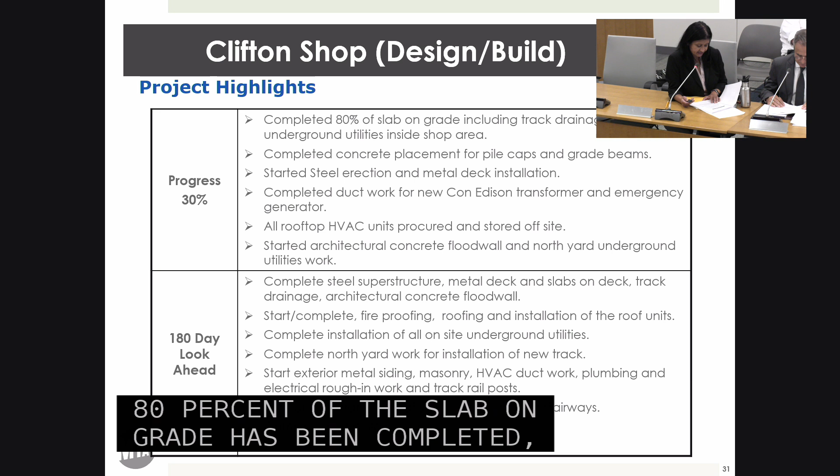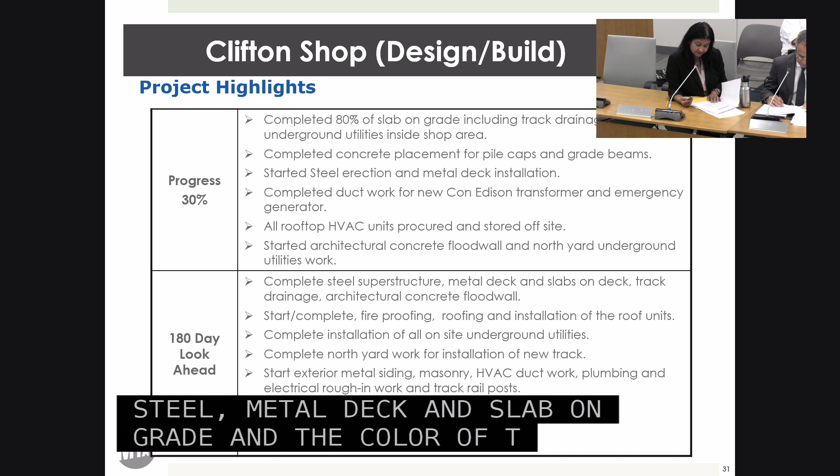The project is about 30% complete. 80% of the slab on grade has been completed. Steel erection and metal deck installation have started. We anticipate the crane will leave the site by the end of November once the steel is completed, at which time the roof and roof units will also be installed. With the installation of steel, metal deck, and slab on grade, and enclosure of the building, fireproofing, masonry, HVAC, plumbing, and electrical rough-in will start. The plan is to also begin installation of staircases, bridge crane, and elevator work in the next 6 months.

As shown in the earlier slide, Clifton Yard is a narrow and long site, with the shop on the east and the station on the west. Major site work needs to be done north and south—north being the far end of the site, and south facing us. It's all in a linear fashion.

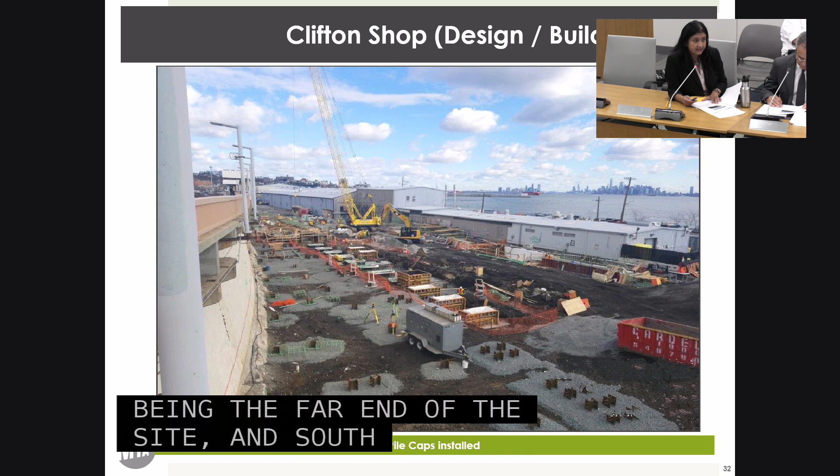Here you see the pile caps that have been installed. The crane at the far end of the photo is starting the installation of the foundation beam, and the path the crane uses is now the corridor which the contractor uses, moving north to south.

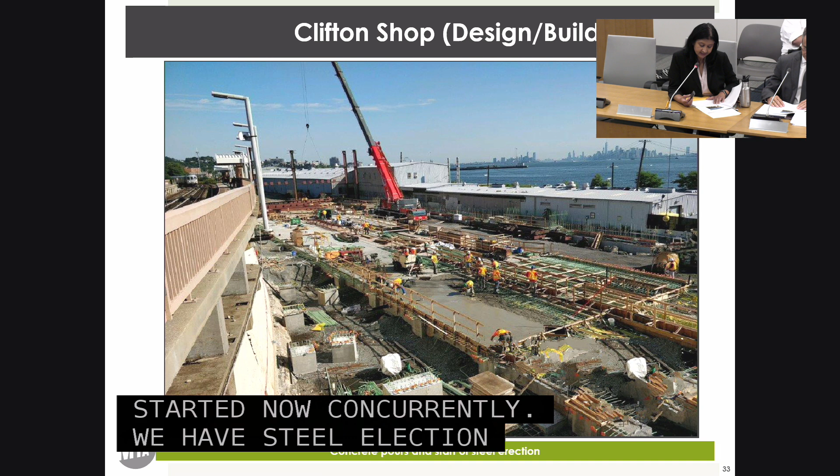A lot of activities have started now concurrently. We have steel erection which has started. Concrete form work continues at the east part of the yard, next to the old shop. Concrete is being poured on the west side of the yard, next to the station.

The front yard of the shop is very critical as all its deliveries come in and out from there. It's also where we have all the utilities being connected to the new shop. The form work you see in the slide are the turntables for the 2-track. This is an enhancement for the new shop.

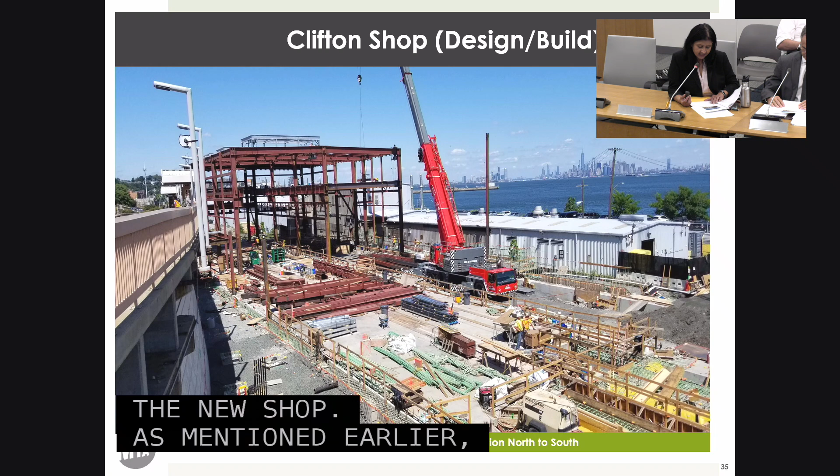As mentioned earlier, the work needs to be phased from north to south. The corridor of the crane is what we are using for getting material in and out. This is the steel erection.

This slide shows you what it looks like today. Actually, it's a week-old slide. Steel work is almost on its way to being completed.

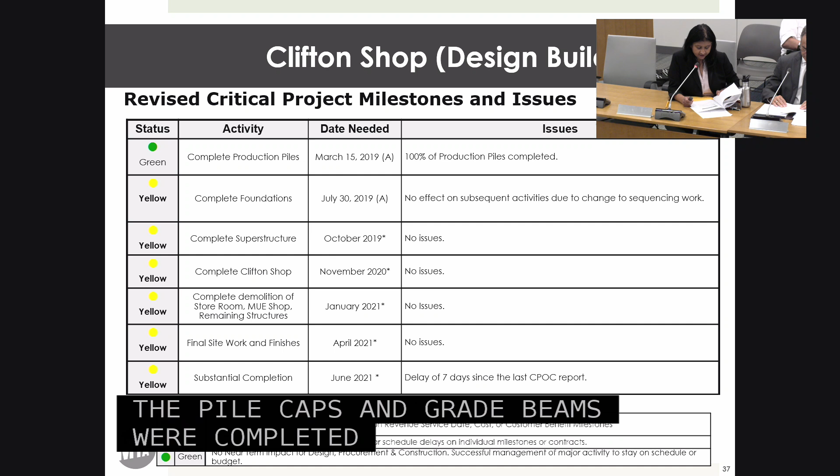Major milestones: pile driving was completed. The pile caps and the grade beams were completed on July 30, 2019. The contractor resequenced their concrete activities in order to have the steel work completed earlier. This has had no effect on the subsequent activities.

The rest of the milestones reflected above are the contractor's schedule. We are yet evaluating their schedule.

Two major risks were identified during the risk assessment phase. The first one is testing and commissioning of the equipment. PDC is a new contractor. Commissioning meetings have been started. The commissioning plan and the team have been approved. Preliminary submissions for test procedures and manuals have started.

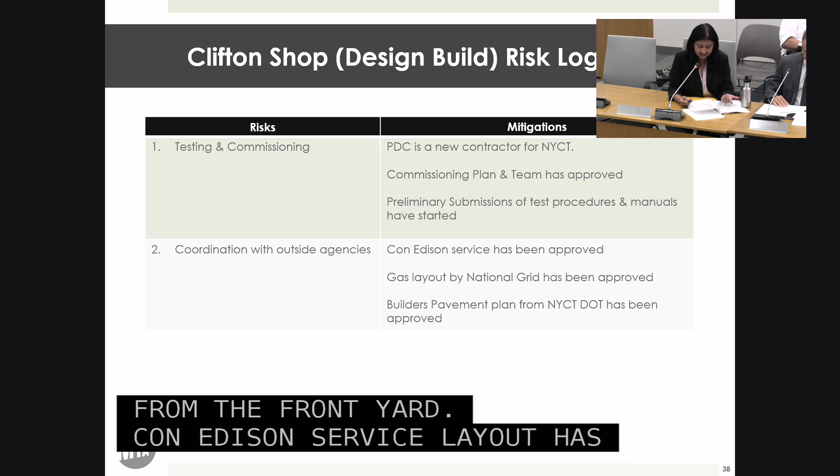The second was coordination with the outside agency. As you had seen in an earlier slide, all utilities come in from the front yard. Con Edison's service layout has already been approved. The gas layout by National Grid has been approved. The builder's pavement plan also has been approved so far.

So, Sonia, so the project's 11 months late. It's going to come in within budget. We believe we'll hear from the IEC in a second.

I'm just curious, what are the lessons learned on this project at this point? Lessons learned: one was the hazardous soil.

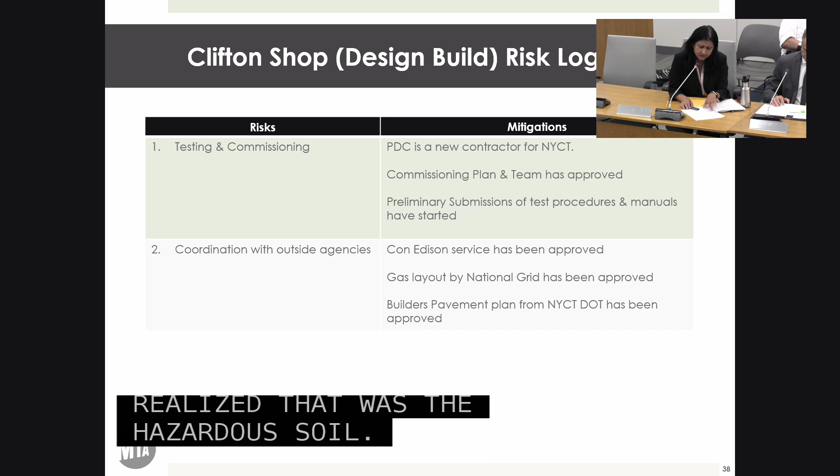We did not have in the spec that you have to test for hazardous soil, but what we did have is when you start your environmental boring, you need to test it to tell us what it is. During the testing, we realized that was hazardous soil. So to date, we have 2,000 cubic feet of soil which was hazardous, which has been disposed of.

The other one was pile driving. We had a limited number of borings done in this project because it was an active site, we couldn't go and do it. Pile driving activities took much longer than anticipated. So these are the two major lessons learned.

Got it, thank you. IEC, any questions?

IEC then. Good afternoon, my name is Cesar Silva, and I will be presenting the IEC report for both the Coney Island Yard and 207th Street Yard projects.

The Coney Island Yard project report can be found starting on page 80 of the CPOC book. Since we last reported on this project to the CPOC committee, and based on the IEC's review of the project schedule, the project is proceeding according to plan. The substantial completion date remains at September 2022.

Based on the IEC's review of the project's total budget and contingency, the associated design, work in place, and soft costs, the IEC finds that this project is within budget. The IEC participates in monthly risk management meetings with the project team. In the IEC's opinion, the project has effective risk mitigations in place to control the top project risks. This concludes the IEC's comments on the Coney Island Yard project.